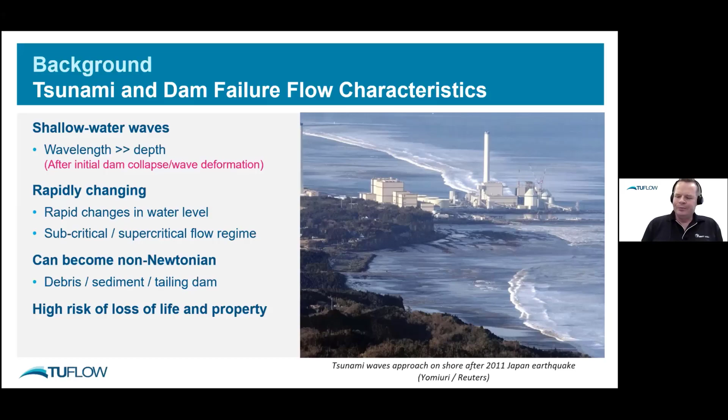Very transient phenomena, rapid changes, often regimes of both subcritical and supercritical flow with hydraulic jumps in there. And particularly in the case of dam failure, some of them are hydro dams that are just full of water, and others might be a tailings dam for a mine site, which can be full of mud, in which case you've got a very non-Newtonian flow. Whichever way you look at it, these are terrible events, catastrophic events. In many instances, a significant loss of life and a significant loss of property as well. So the better we can plan for these, the better everyone in the world will be.

For these sort of models that are generally short time scale and generally not huge physical scale, we're not talking about modeling tsunami propagation around the whole planet. We're talking about localized effects once the wave runs up onto a coastline. Including atmospheric pressure terms are really just not necessary, and likewise external forcing from wind isn't needed either.

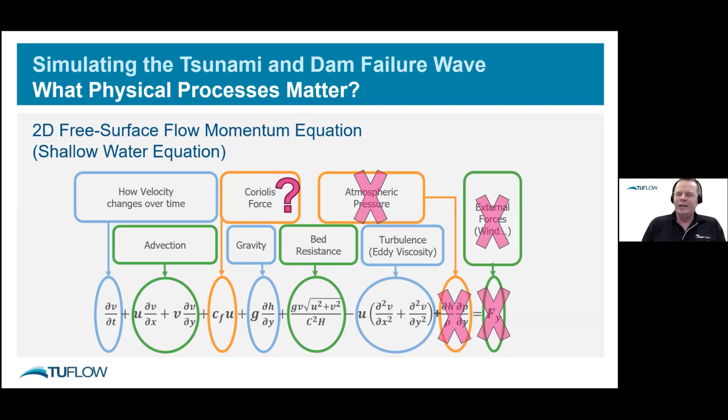The only other one in there that could be included is Coriolis force, and I think there's a reasonable argument that for most of this modelling it's not necessary, either because the physical length scales are so short, or else because we're not talking about the actual physical movement of fluid over thousands of kilometres to changing latitudes. It's a very localised movement, short, it goes back and forth. And so the Coriolis term really cancels itself out again after a short time.

But as discussed before, there's also hydraulic jumps that can happen in there. So shock capturing is important. Capturing the actual height of the waves that propagate through on land is very important, and that generally requires a second order scheme to get that nailed right.

You need an appropriate mesh size. Generally, you need a reasonable resolution within the urban environment, or in the case of dam modelling, within the river valley and any towns of interest. But then you want to be able to coarsen that mesh out in regions that are not so interesting. So the flexible mesh is really useful, or an adaptive mesh size is very useful.

The physics, again, as I said, transient with hydraulic jumps. Generally, to capture what's happening in detail, you also need small time steps. So using solvers that use an implicit matrix formulation and solving over a Courant number of 10 or 20 is not necessarily what you want for tsunami or dam break modelling. Generally, an explicit solver is what you want, and small time steps to capture the detail.

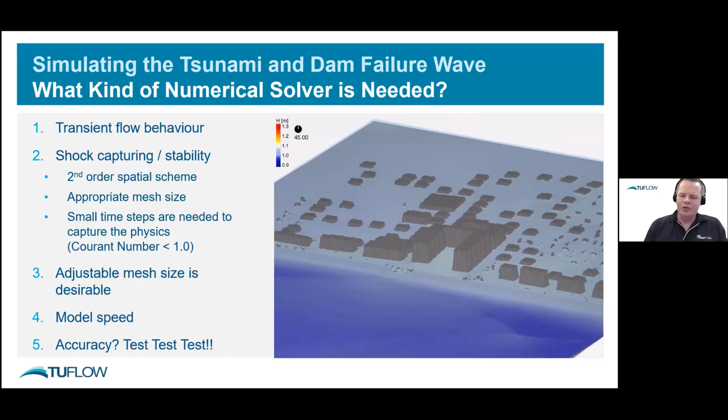We have a couple different software packages that can do dam failure and tsunami modeling. We've got the standard TUFLOW software, or the HPC, which is the GPU variant. And then there's also TUFLOW FV, which is probably one of our lesser known products, but also a very, very powerful engine. I've just captured there the common features of each solver, which are pretty much everything in blue there, and the pink is the different one.

So in TUFLOW, we've got the standard HPC solver. You can either have a regular grid, or you can have a quad tree grid with adjustable mesh size, and Shuang will show you some more examples of that later. In TUFLOW FV, it's a fully flexible mesh, triangles and quadrilaterals. The standard TUFLOW HPC uses an explicit fourth order temporal solver.

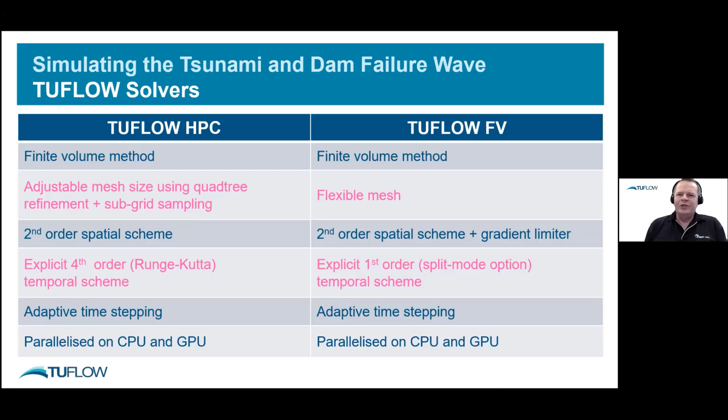Whereas TUFLOW FV, although it's a first order solver, it actually offers a mode split option, which is particularly useful when you've got the tsunami propagation from deep ocean up onto the continental shelf, because it solves the deep wave propagation separately to everything else. And both of them have got adaptive time stepping and very, very fast engines that run either on multi-core CPU or on GPU.

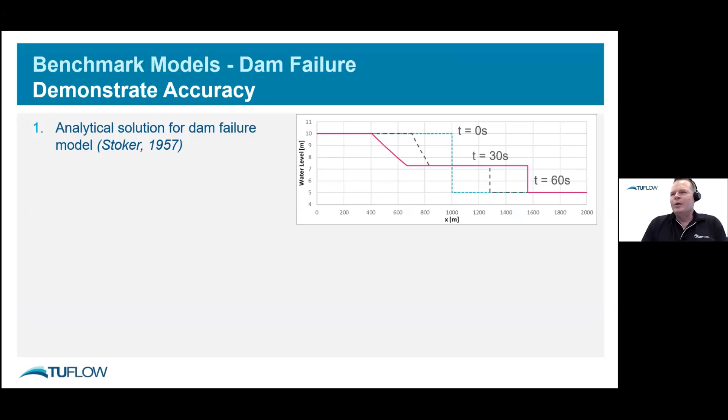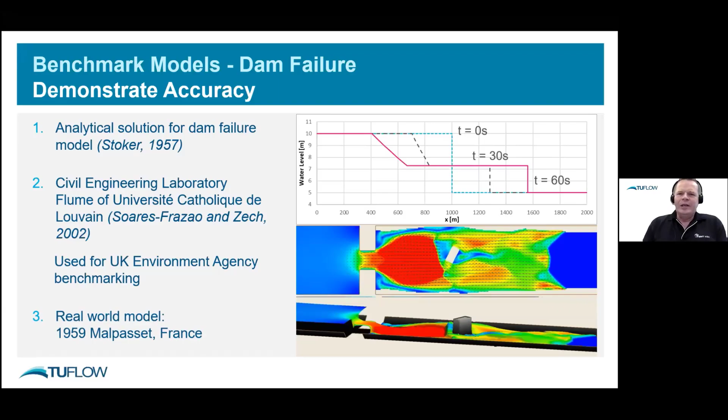Okay, so let's talk about some dam failure modelling work. The first example we've got here is a one-dimensional problem that's got an analytical solution from Stoker. The second example we're going to talk about is a two-dimensional problem of a dam breach into a channel that's got a building obstruction in the channel. And then the third example we're going to discuss is the Malpasset dam failure in France from 1959.

Okay, so looking at the one-dimensional model here, what's really important is this analytical solution from Stoker assumes hydrostatic pressure. And that basically means that it's not going to capture the initial collapse of the wall very well. But beyond that, it actually captures everything else quite well.

So we've got a step change in water depth here from 10 meters down to 5 meters at time 0. Then you remove the barrier that's holding the wall of water back, and then you let it propagate. And you'll get a kind of a half-height shelf that propagates to the right with a hydraulic jump there, a steep wall jump on the right. And then you've got a sloping wall acceleration of flow on the left. And as time goes on, those two waves spread apart in the two different directions.

Importantly, if we draw some lines there demarking the transitions of depth, we can calculate that the very left line is going to be traveling to the left at the wave celerity speed of root GH0. The next line at the bottom of that shelf propagates at the speed given by that equation there. Now, I haven't gone through all the details of the maths. This is straight out of Stoker's paper.

Then we've got U2, the horizontal velocity of the intermediate shelf of water that's now flowing to the right. And then we've got the velocity of the wall there; the hydraulic jump velocity is actually different to the fluid velocity behind it. Then we've also got the wave velocity in the shallow water to the right. You can combine all of that together to eventually get a solution that you can solve for all the different wave speeds of what's happening in there. And really the point of this is it's quite an advanced mathematical model.

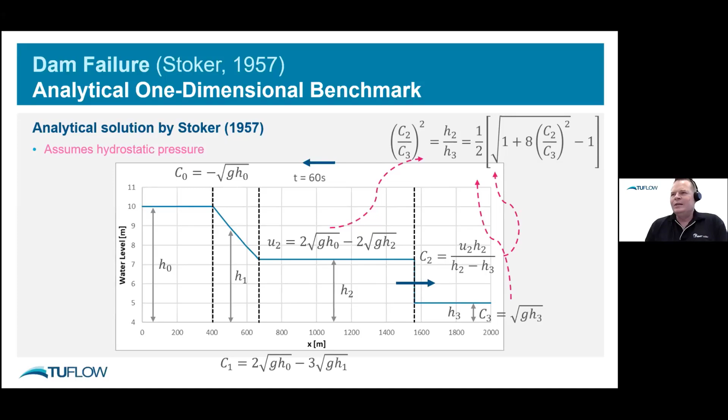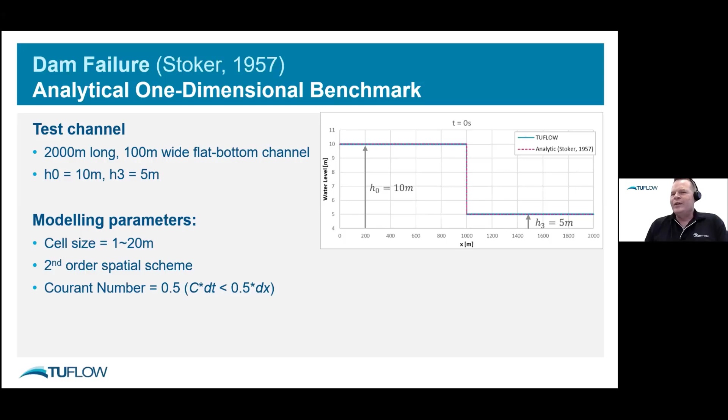Interestingly, when we actually test this with our software, by applying those equations I showed you on a slide further back on a cell-by-cell basis and capturing physics, which is continuity of mass and continuity of momentum, once you capture all of that and do it properly, then it actually reproduces the solution just fine.

So this is at time 0, and we've got two different lines there. The dotted pink line is the analytical solution from Stoker, and the solid blue line is the result from the TUFLOW HPC solver. And that's at time 30 seconds, and then at time 60 seconds, and you can see the agreement is just absolutely spot on. Now, this is using a cell size of 1 meter, second order solution, and a Courant number of 0.5, and that's 90 seconds.

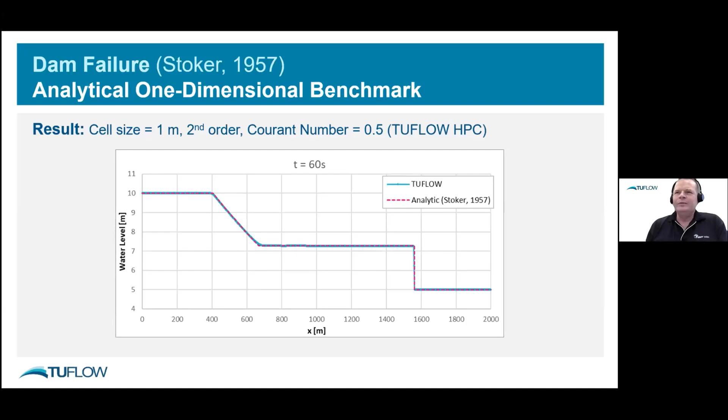Okay, now when we run this with some different cell sizes, we're plotting 3 different sizes there: the blue, the green, and the black or dark gray. The dark gray is at 20 meters, which is starting to get quite a coarse cell size, and we are actually beginning to see a little bit of blurring of the edges of the solution on the left-hand propagating wave, and also a little bit of a numerical artifact in the hydraulic jump at the right-hand side, which is a function of the second order calculation.

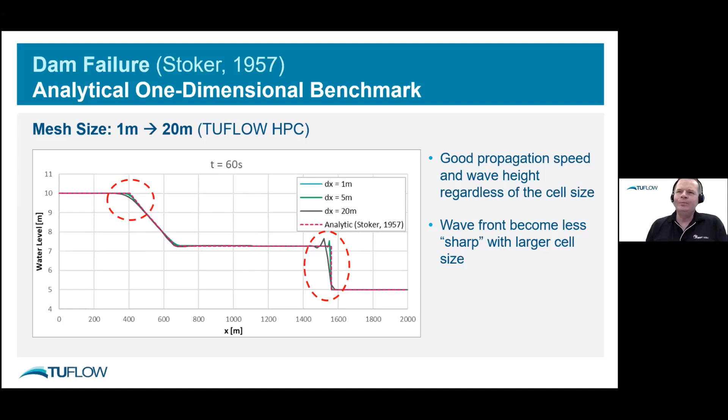In TUFLOW HPC, that second order calculation is tuned quite highly so that it tries to stay second order for as much as possible before dropping back to a first order solution. And that's giving that little edge there.

We can run the same model in TUFLOW FV, which is our flexible mesh solver. In particular, its second order spatial solution is tempered with a gradient limiter, which prevents that little artifact from happening on the hydraulic jump on the right-hand side. Although the price of that, as you can see on the left-hand side, is it hasn't quite captured the sharp edges that you can see on the analytical solution. But overall, it's still a very, very nice solution.

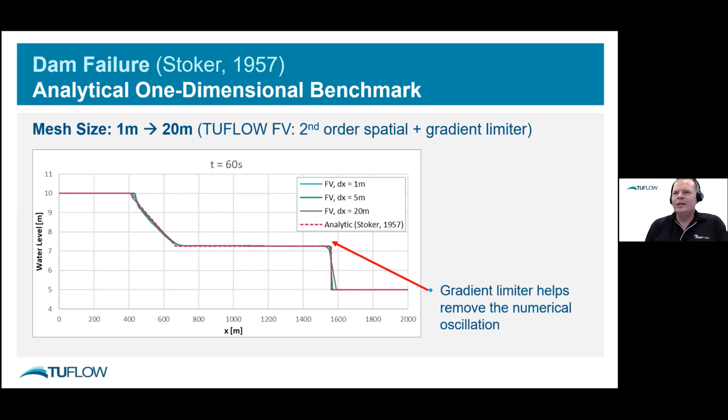So that goes back to what I was saying earlier about the initial collapse of a dam wall. If it's an instantaneous failure, you won't get exactly the right solution for that first number of meters either side of the dam wall. It's not until it propagates further downstream that the solution will be right. However, dams don't always fail with an instantaneous collapse of the wall. Sometimes you get a piping failure, which is just a gradual leak that grows and grows, and then the breach widens. So the failure mode of the dam has got a huge dynamic range of possible flow rates.

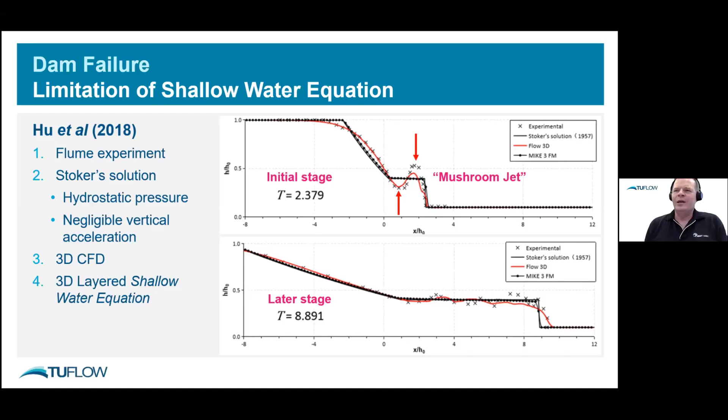Okay, so now we're on to the second case I was talking about, which is a two-dimensional model where you have a channel. You've got a reservoir at one end. You've got a dam wall with a gate. It's not a full width gate. It's only about less than a third of the width of the whole channel; it's about a quarter of the width. And then you've got a building that obstructs the flow as the flow comes out of the gate and discharges into the channel.

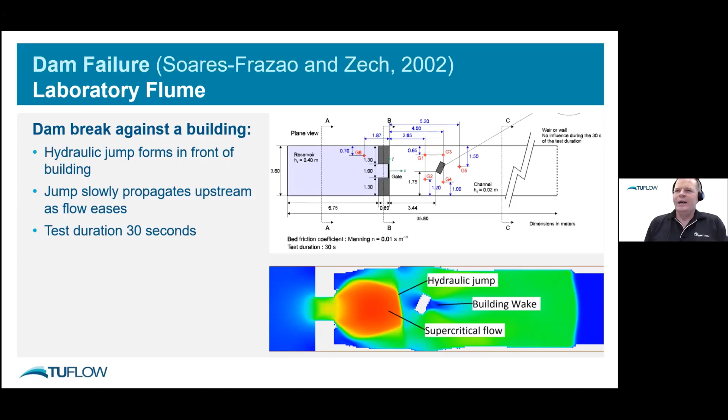And as you can see in the image down the bottom there, which is taken from a point in time after the breach, you get supercritical flow coming out of the gate, and then you get a hydraulic jump in front of the building, you get a wake behind the building, you get another smaller jump in depth that's propagating to the right further down. It's quite a complex solution that you get here, and certainly there's no analytical answer for it.

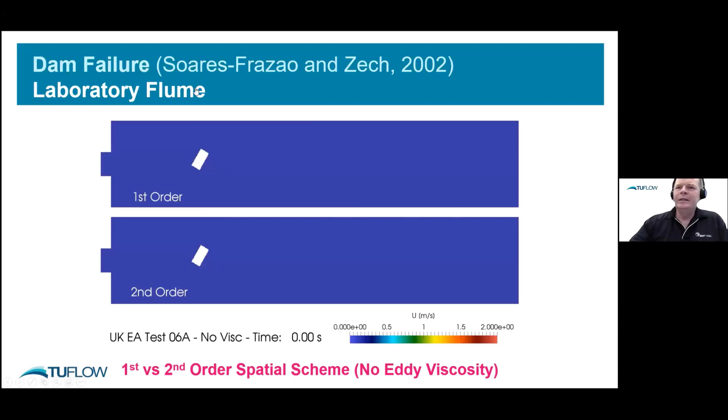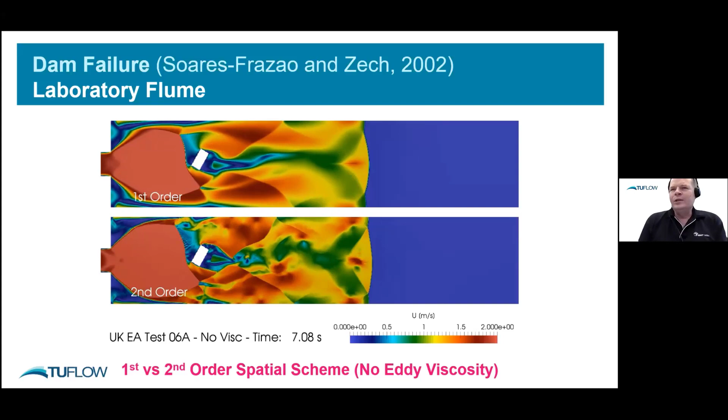But what I want to point out here, hopefully this movie is coming through for you now. This is an animation showing velocity as a function of time. The animation up the top is using a first order solution. The animation down the bottom is using a second order solution. And very importantly, both animations have no viscosity, no extra viscosity added.

So the second order solution, down the bottom there, you can see is very, very detailed and rich in hydraulic jumps and vortices and vortex shedding from behind the building and wakes that wiggle back and forth like a snake's tail. Very pretty solution, but really the question is, is it right?

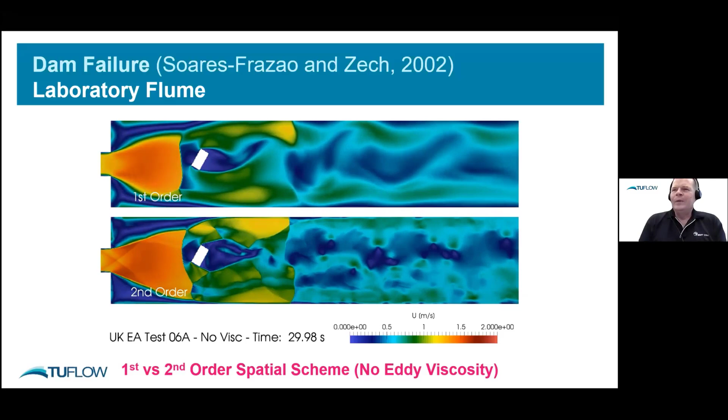What I want to point out from this animation is that the second order solution is much sharper than the first. The edges of the hydraulic jumps and so on are much better preserved in the second order solution. The first order solution looks like it's already got some viscosity in it. And that's exactly right. That's what first order does: it adds a numerical component of viscosity to the solution.

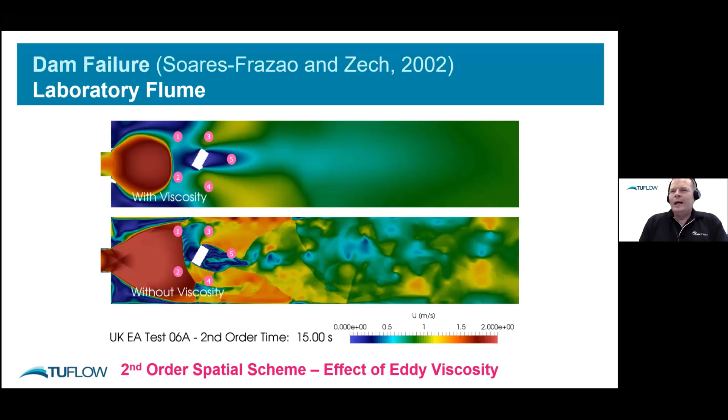And we've done a lot of work on this over the years, and we have actually arrived at a viscosity model that seems to work very nicely across a broad range of experimental sizes, all the way from lab scale to intermediate scale up to real world scale, without the user having to keep adding or adjusting terms.

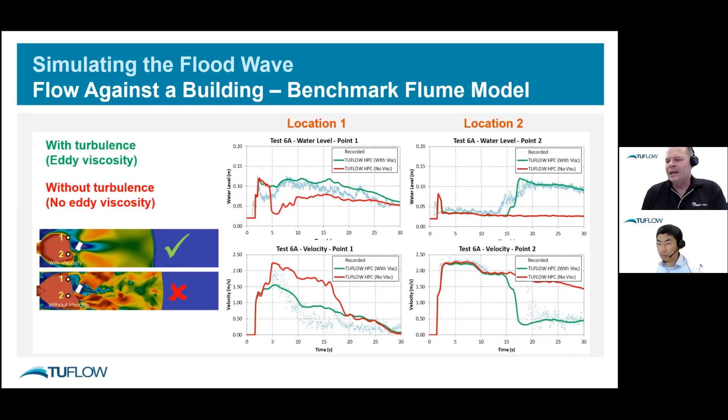Okay, so that's the end of my first segment. I'll hand over to Shuang now, and he'll take you through the Malpasset Dam failure and then a whole lot of tsunami modeling work. I'll come back at the end to talk about non-Newtonian.

Thank you. Thanks very much, Greg. It's an amazing introduction, very interesting modeling result. Thanks.

So in the next part we'll introduce a benchmarking test for a real-world dam failure model, which happened to the Malpasset Dam in France back in 1959. The dam collapse was caused by the rise of the dam water level due to rainfall, but the dam was also called the thinnest dam in Europe at that time. Surprisingly, we actually found some video clip from that dam failure, so I'd like to switch to this one and play it briefly.

And as you can see, a big chunk of the dam wall collapsed almost instantly. The report says that almost the entire dam wall collapsed during the dam failure event. So it generated a 40-meter high wall of water moving rapidly downstream. And unfortunately, this event happened at night, so it caused mass casualties.

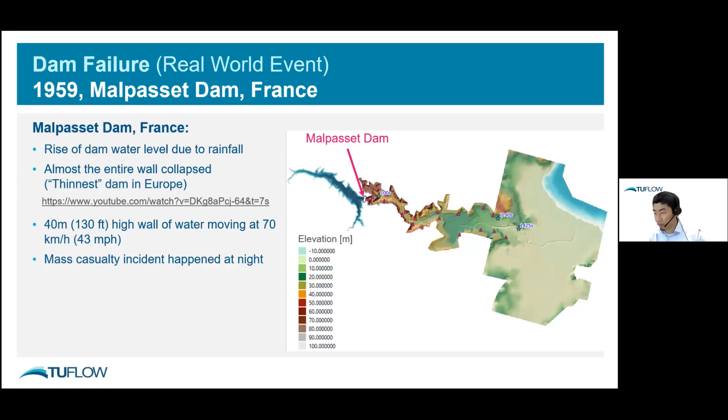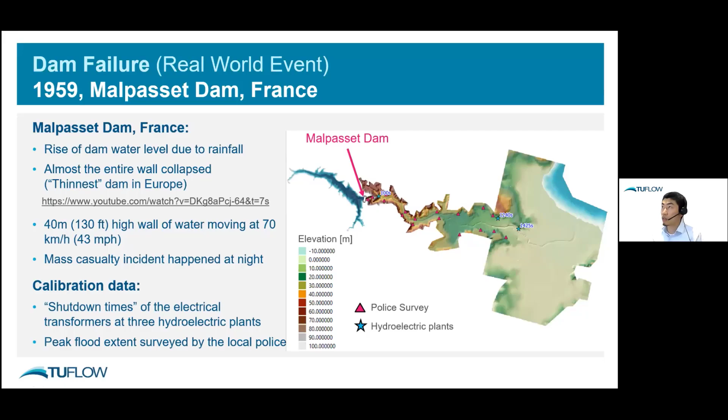At that time, there were 3 hydroelectric plants inside the valley, which recorded the shutdown time, so we can use that to calibrate the arrival time of the dam water. After the event, the police also conducted a field survey to obtain the flood extent. So we are going to use those 2 data to calibrate our model.

For the modeling, we used a 20-meter DTM and 20-meter cell size. Because the resolution of the DTM is relatively coarse, we didn't apply SGS. And for simplicity, we also used a uniform Manning's n across the whole domain, and we calibrated the Manning's n from 0.03 to 0.05. The initial water level inside the dam was 100 meters. And again, for simplicity, we assumed the water was released instantly.

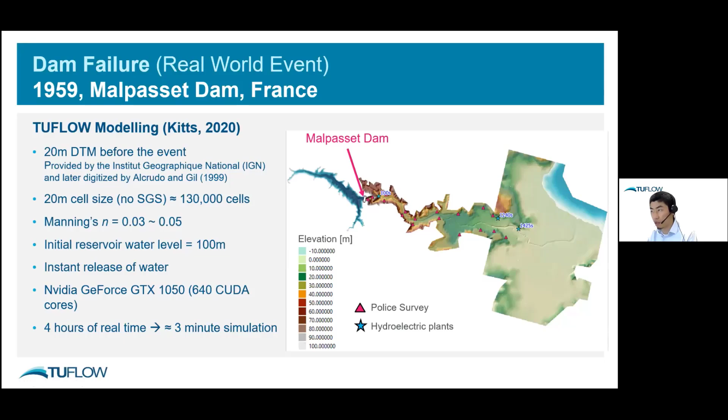We did the simulation on a mid-range GPU card, and it only took 3 minutes to complete the 4 hours of the real-world event. So here is the animation of the modeling result. As you can see, the dam water is released and moves very rapidly downstream. And it's also hitting all of those survey points, so it's matching the flood extent, which also indicates the height of water when it arrived at those points is in a reasonable range.

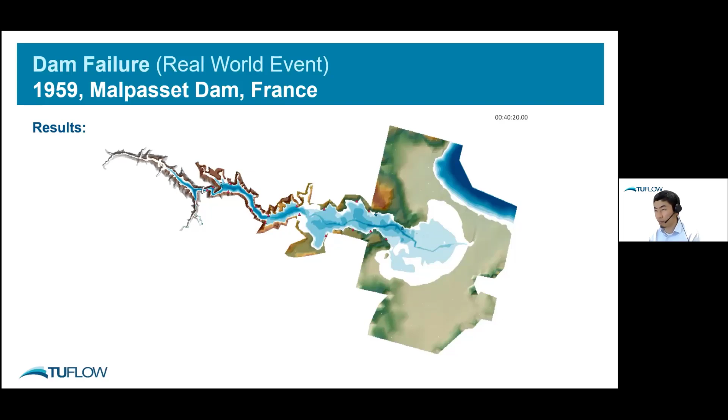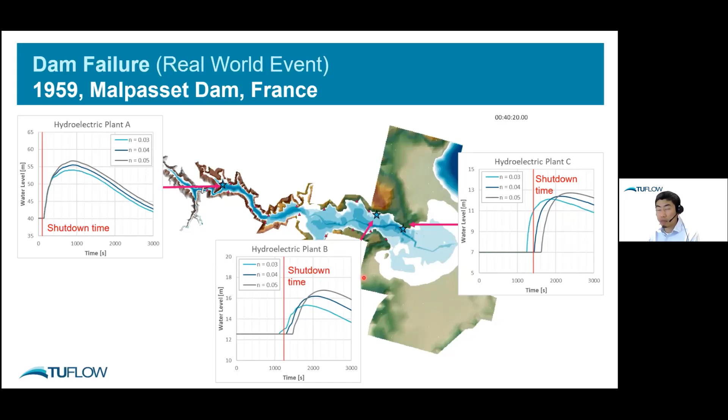This wraps up the dam failure benchmarking test, and in the next part, we'd like to move on to the tsunami benchmarking model. In this section, we compared our model against 2 events. One is a large-scale lab experiment, and the other was the real-world tsunami event that happened in Japan back in 2011.

So dam break flow and tsunami flow share lots of similar hydraulic characteristics, but what we found very challenging in tsunami simulation is, first, the source of the tsunami and the receiver we want to study are usually much, much farther apart. In this case, it's about 200 kilometers away from the source of the tsunami, and it took about 1 hour for the peak of the tsunami to arrive at this location.

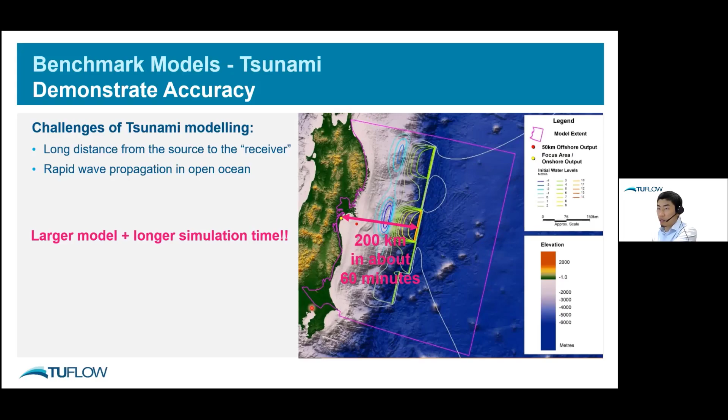And also, a dam failure usually happens in a constrained valley, but a tsunami happens in the open ocean. So we usually have to create a much larger model domain, which results in much longer simulation time. So this is where flexible mesh or quadtree mesh can really shine. And of course, GPU acceleration will help a lot with the simulation time. So in the next part, we would like to focus on those two parts.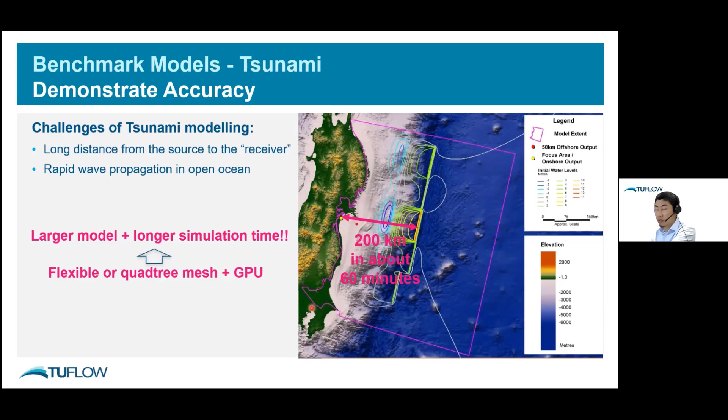So the first case is a large-scale flume experiment done at Oregon State University. They created a physical model of a seaside city called Seaside, and they conducted lots of measurements, including optical measurements and velocity and water level measurements at some gauge points. And we would like to thank Dr. Park and their team for sharing the data with us so that we can carry out this benchmarking test.

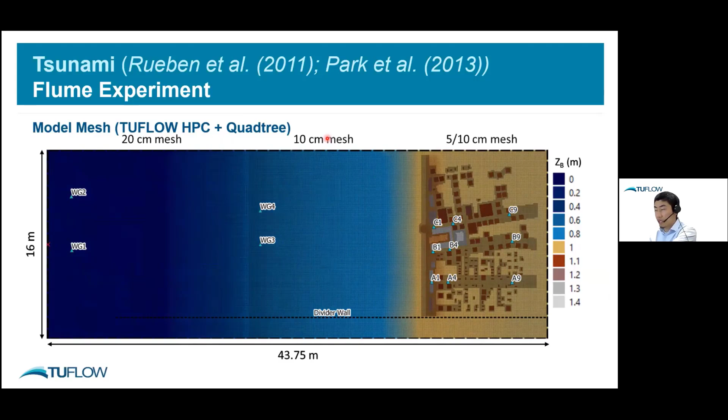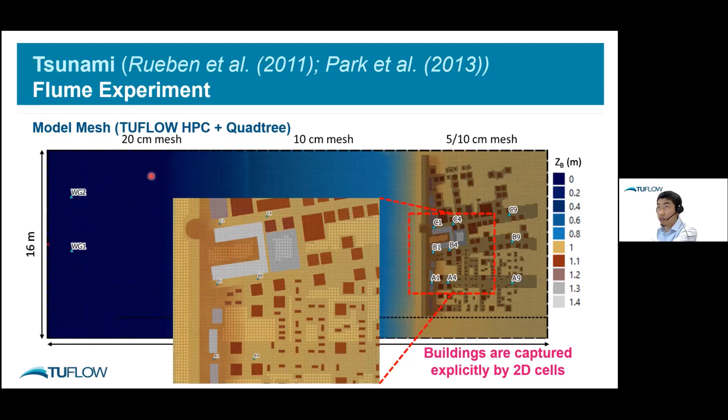So for the modeling, we used TUFLOW HPC and quadtree refinement. We applied 3 layers of refinement with only 5-centimeter grid inside the urbanized area, and then we relaxed the mesh size on the ocean side. So with this powerful tool, we can really explicitly capture those buildings with 2D cells, just increasing the bed elevation, instead of traditionally using a large cell and just bumping up the Manning's n.

So this is the modeling result. With this level of refinement, we can really get the result at street level. And as you can see, the wave is propagating, hits the buildings, and runs up through those streets.

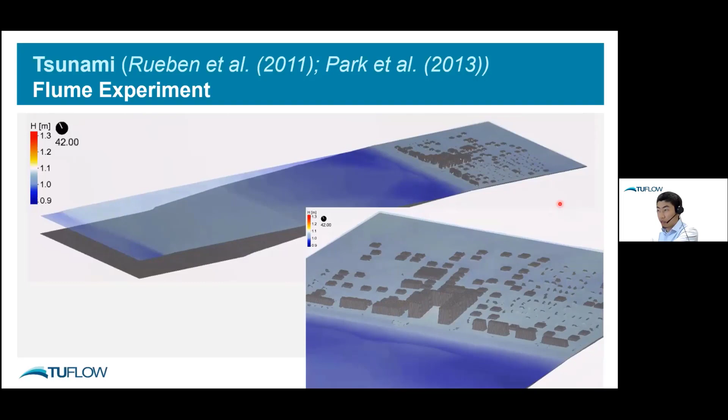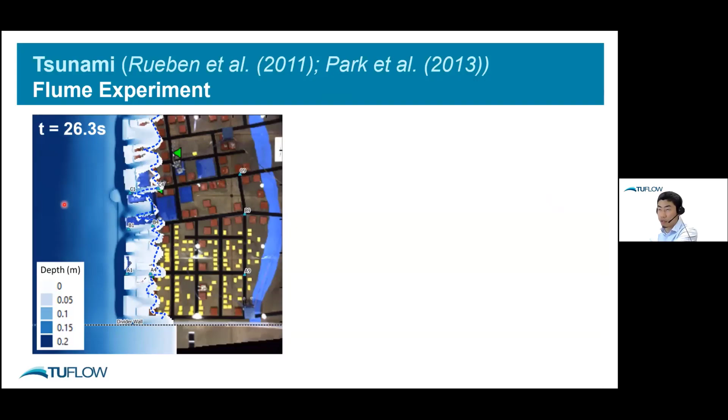So in the next section, let's compare the result with the experiment measurement. So this image, the blue dot line shows the optical measurement of the tsunami front location at a time of 26 seconds. And of course, the blue contour is the modeled result. And this is 2 seconds later.

And here is another evidence that tsunami flow is highly transient. As you can see from those white water, there's lots of hydraulic jump happening after this building and before it hits the second line of buildings. And in simulation, we also captured this, as you can see from the water depth contour.

So very shallow depths here, and it became much deeper here. So there's some hydraulic jump happening here and also here. So yeah, even if we don't get this perfect in detail, those phenomena are captured in our model.

And back to the propagation area, as you can see around this street, the model produced very good agreement with the measurement, but around those 2 streets, the model result is somehow behind the optical measurement. So we took a further look at what's happening inside this street.

Because in a regular grid mesh, we inevitably create some mesh that acts like a vertical wall against the direction of flow. We call this a sawtooth effect, and it will create extra artificial loss that will slow down the tsunami propagation. So in this study, we also applied the subgrid sampling.

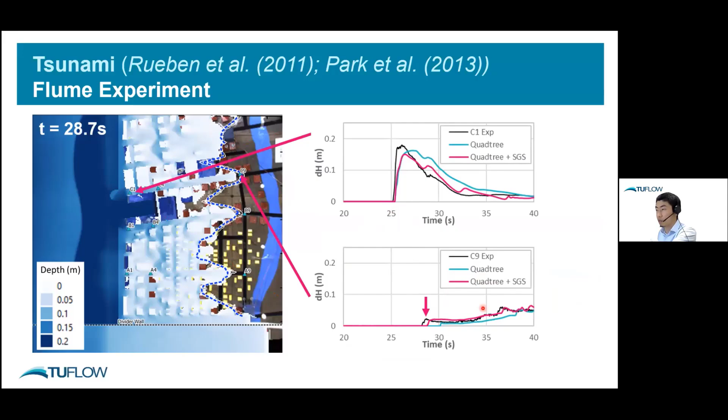Also, let's look at the maximum height here at the first gauge point and the last gauge point. And again, as you can see, SGS, the pink line, will improve the arrival time significantly compared to the non-SGS model. And the maximum water level is also in good agreement.

So let's move on to the next case, which is the real-world tsunami benchmarking model that happened in Japan after the magnitude 9 earthquake back in 2011.

At that time, I was doing my PhD in hydraulic engineering in Japan on the day of the earthquake. So I still remember that day vividly, and it was quite scary to learn about those events from the news. But that also, I think, motivated me to chase my career. And right now, I feel really privileged to be a part of a software development team, and the software we develop can be applied in this area.

So it was one of the most significant tsunami events recorded in history. By the time the water arrived at the coastline, the wave height was from 2 to 16 meters. This image shows a very high seawall, 10 meters high, and it was designed for a 50-year tsunami event, but even that one was overtopped, and so much water washed up the coast.

And as you can imagine, it caused massive casualties. Actually, 90% of the casualties were caused by the tsunami rather than the earthquake itself. And there were several GPS buoys offshore which recorded the water level. And after the event, the researchers also conducted a massive field survey to obtain the flood marks from the tsunami-hit area.

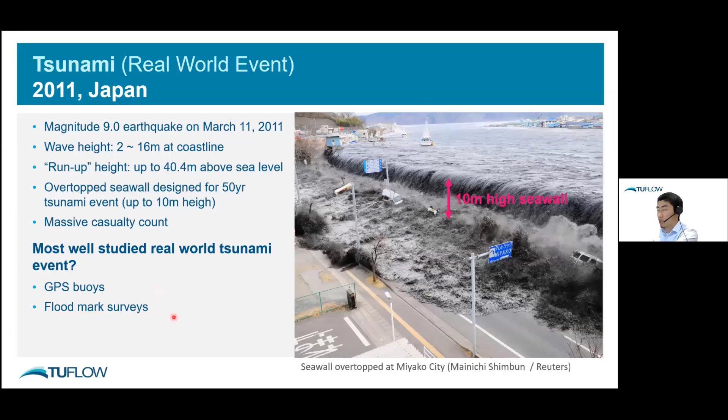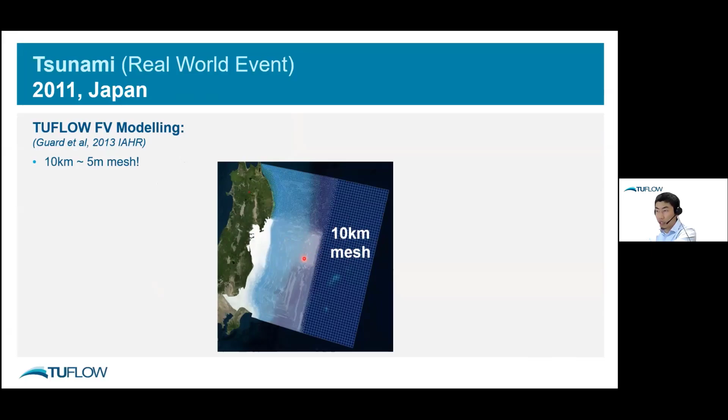So for the modeling, we applied TUFLOW FV flexible mesh modeling. And as you can see, we varied the mesh size significantly. It ranges from 10 kilometers here, the other side of the ocean, and here is the source of the tsunami. And at the onshore area, we refined the mesh to 5 meters so that we can get very detailed tsunami height there. In this presentation, I will present 2 mesh resolution models.

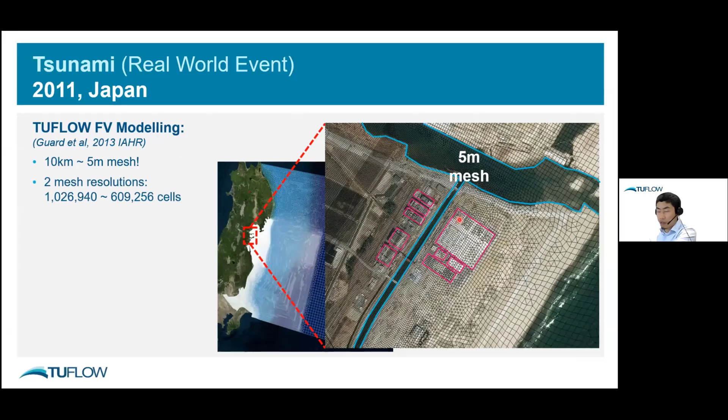Also, I will compare first and second order spatial schemes, and the boundary condition or the initial water level was derived based on undersea bed deformation, which was a study done by Tohoku University. And we ran the model on a high-end GPU card; it only took less than 20 minutes to run the whole event.

So again, we'd like to show 2 videos and ask everyone to guess which one is the first order and which one is the second order. Okay, I will just pause this one here. The one on the right-hand side, as you can guess, is the second order because it has much darker red and a very sharp edge of the tsunami front, and also very sharp reflection from the coastline.

I'd like to just play this video again to show that the tsunami propagates really fast in the deep ocean, but it became really, really slow in shallow water, especially inside this bay area.

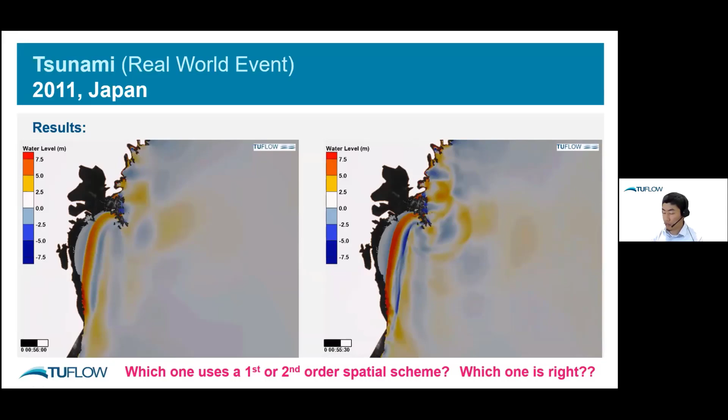So the next question is, again, which one is right, the first order or the second order? To answer that question, again, we have to compare the modeling result with the field measurement. And for that, we have water level recorded at one offshore GPS buoy, and we also have 5 watermarks in this urbanized area.

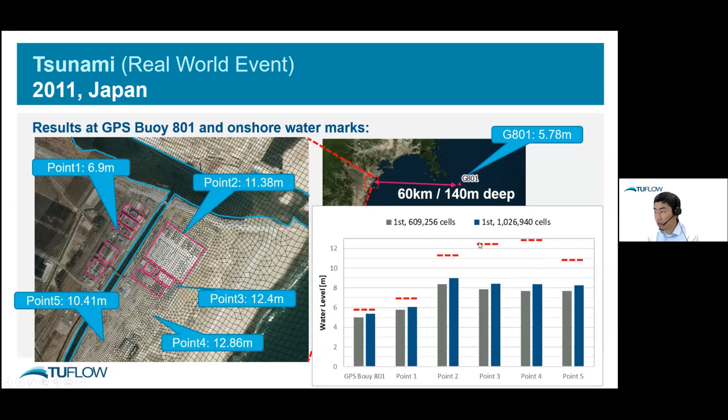So this is the result from the first order model. The gray one has relatively coarse mesh, and the dark blue has a much better mesh resolution. The mesh refinement does help increase the water level, but still it's quite far away from the observed water level. But once we use second order model, the agreement became much better at this GPS buoy, as well as those points 1, 2, and 5.

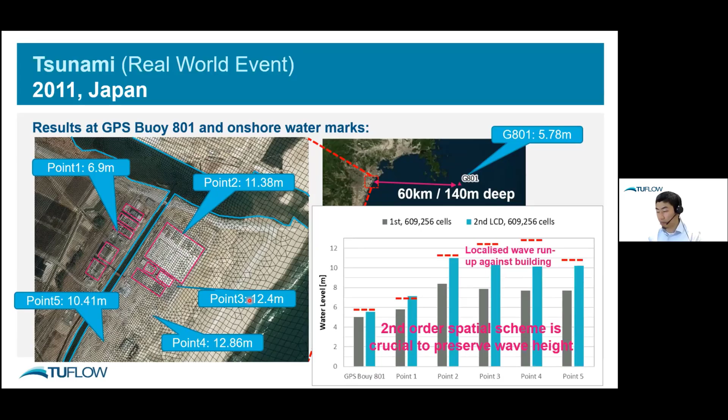Points 3 and 4 are the first building from the coastline, so we think there is some localized wave run up. That might cause some small differences, but overall, it demonstrates that the second order spatial scheme is really crucial to preserve the wave height in this kind of tsunami simulation, where you have a huge range of mesh sizes. So that wraps up the tsunami benchmarking.

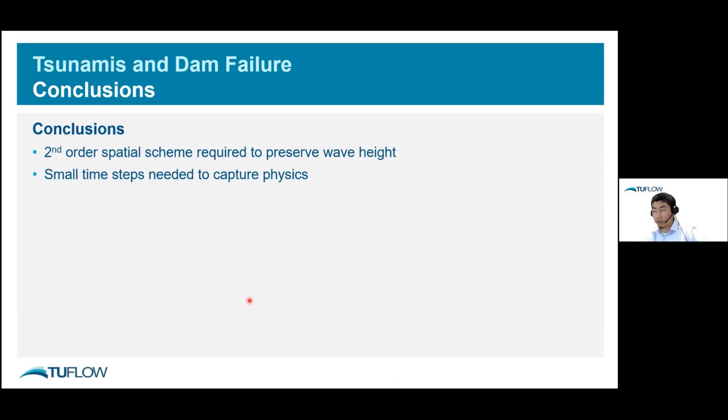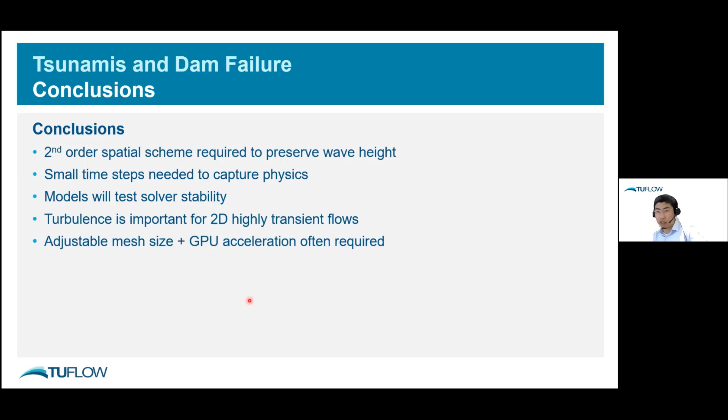And before we move on to the non-Newtonian part, I'd like to show some conclusions for tsunami and dam failure modeling. As I just mentioned, second order spatial scheme is crucial to preserve the wave height, especially in tsunami modeling. And of course, small time step is needed to capture the physics. Because those two types of flow are highly transient, it will really test the stability of your model. And as Greg showed, the turbulence is very important because it's a 2D phenomenon. And again, adjustable mesh and GPU acceleration is always very helpful.

So yeah, we'd like to repeat our message that it's crucial to do a benchmarking test and know the accuracy and reliability of your model. If that's not possible, just try to check if the model you are using is designed to model this phenomenon and if they have benchmarked against that.

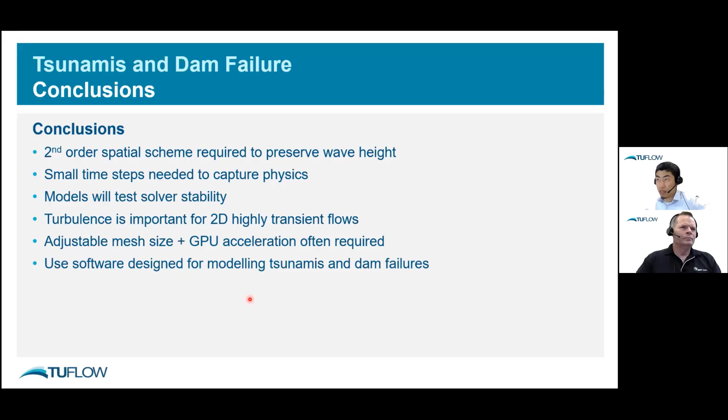So thanks everyone. I will hand the presentation back to Greg. Okay, thank you, Shuang. I really appreciated your inside knowledge there, Shuang, into actually having been there and experienced the fear of those around you, of the significance of those events. And like you said, it is a privilege for all of us to be able to work in an industry where we're actually about preserving human lives first and preserving our infrastructure second.

There's another model called the Bingham plastic model, which still uses a linear response, but it has an offset, which means that it takes a certain quantity of shear force in the fluid to begin to make it shear. So this means that the fluid is actually representing a bit of a solid, something perhaps like jelly or a creme brulee. It doesn't move at all until the shear stress gets beyond a certain amount, and then it will begin to flow.

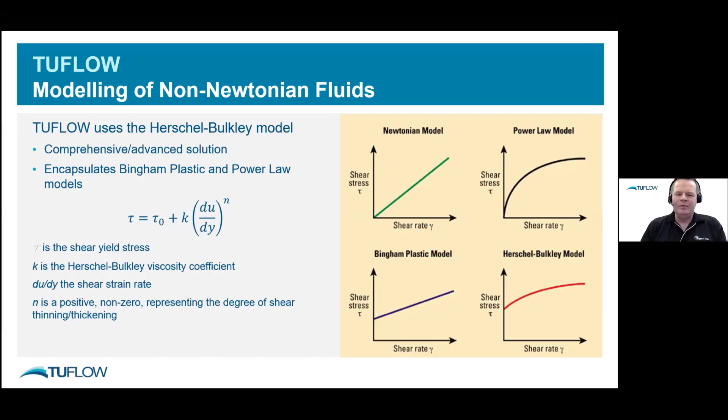The fourth model in the bottom right encapsulates both the power law model and the Bingham plastic model, in that it's got a power law component and a yield stress component. That's expressed in the equation you can see there. That equation's a little bit idealized. Obviously, if n is 1.5, then you can't put in a negative shear rate. So you use the absolute value of the shear rate, raise it to the power of n, and then multiply it by the sign of the shear rate afterwards. Likewise, the yield stress tau 0 will flip sign for flow in the opposite direction. So you get a dead band of plus or minus tau 0 where the fluid doesn't move.

Some benchmarking work. We've implemented that Herschel-Bulkley model in TUFLOW HPC, and then we needed to benchmark against some real-world tests. The first example here is a laboratory scale example using Carbopol solution, a paper by Cochard and Ancey, where they had a reservoir of the fluid. They would open a gate and let it flood out into a puddle on the ground outside the gate. They would repeat this test with different concentrations of Carbopol to give different properties, as well as with the whole rig on different slopes to represent gravity acceleration with the flow.

They had quite a technically challenging way of presenting the results, in that on one hand, they would do a top-down view to look at the footprint or contact line of the flow as a function of time.

And the other view they used is a side-on view to look at the centerline profile of the fluid as a function of time. And they would combine those two sets of results into one graph. So the graph you can see there on the right, the bottom half of it is the top view of the contact line, and the top half of it is the slice view or the side-on view of the center line.

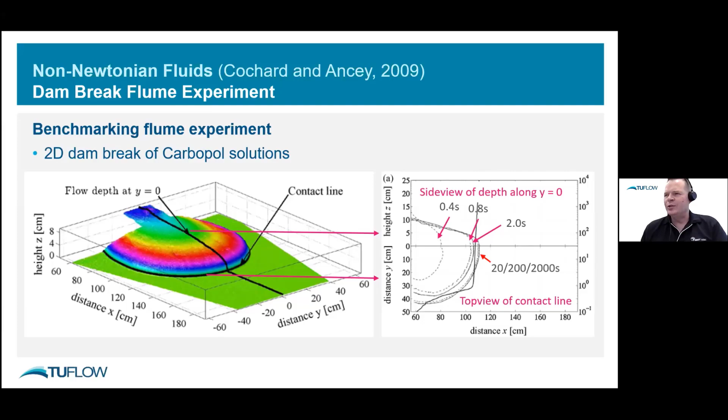And you can see that there's dotted lines there marked for 0.4 seconds, 0.8 seconds, and 2 seconds. And then eventually it just comes to a stop. So the 20, 200, 2000 seconds are pretty much all in the same place because the fluid has come to a stop. It's reached its yield stress. There is a solid line on there as well, which is even more confusing, and that's the propagation distance from the gate as a function of time on the right and distance on the horizontal axis.

So anyway, we've repeated this test in modelling and simulation with TUFLOW HPC. We've just punched in exactly the same numbers as what they had published in the paper for their Herschel-Bulkley model coefficients with a yield stress of 78 pascals. So in this case, a shear thinning power of 0.388. It means that the fluid appears less viscous the more you work it.

And what we've got there in the plots is the blue lines represent the simulation results. Now, the agreement is pretty good. It's not 100% perfect, particularly at 0.4 seconds and 0.8 seconds, but the final footprint of how far the fluid went and its overall centerline cross-section is not too bad.

The very plot on the right is when you have a downhill slope of 12 degrees for the laboratory rig. So you get a bit more gravity assistance on the flow. So you can see it's moved a bit further. And again, the final footprint's pretty good. There's some discrepancy at 0.4 seconds. We think that that is possibly due to the opening time of the gate.

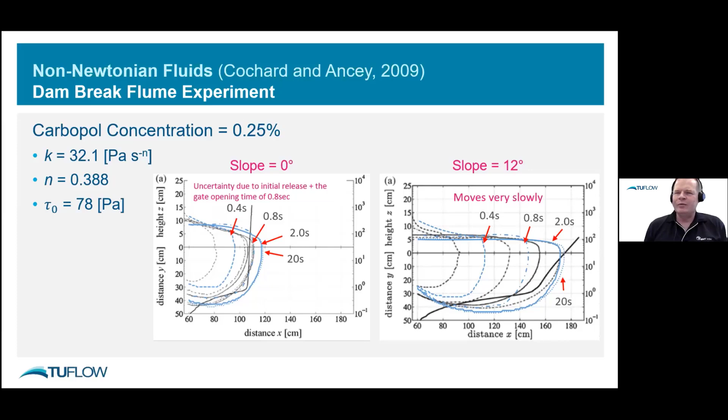In the paper, the authors mentioned that it actually took them somewhere around about half a second or maybe more to physically open the gate for the fluid to move, in that basically the fluid had already reached the 0.4 second footprint mark before they had finished removing the gate. So that's possibly just some experimental difficulties there in getting a rapid gate release of the fluid. But the agreement's there.

Real world application, many of you will have seen this particular dam break in Brazil, the iron ore mine that had a tailings dam in the hill behind the mine, and it suffered really what can only be described as a catastrophic collapse. Just the entire wall of the dam just gave way in one go. Tremendous velocities as the fluid escapes and comes down, ripping out trees and everything. It really is quite spectacular.

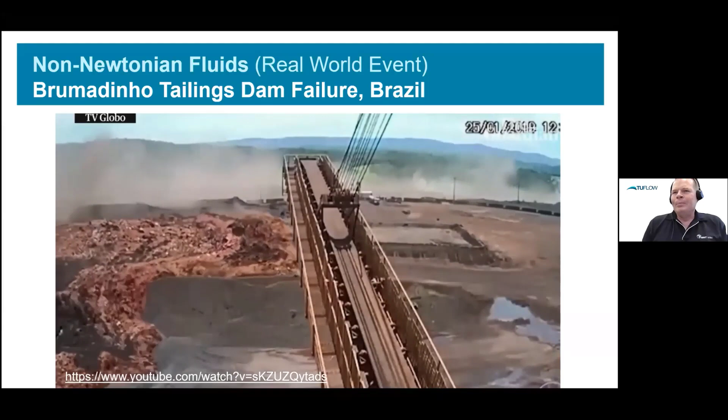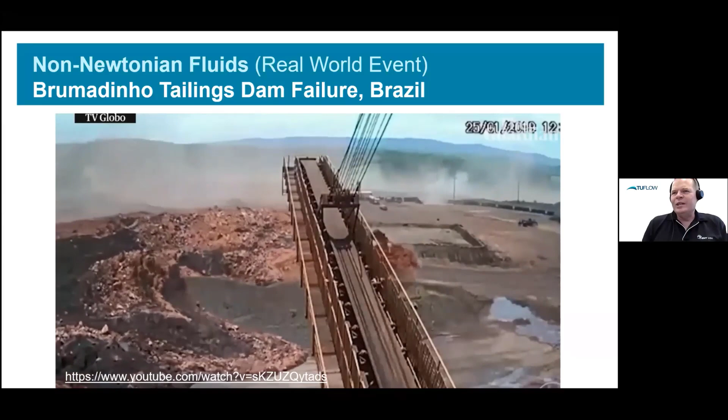Here we've got the fluid coming past the mine site. This is some couple of minutes after the initial burst. And what you can see there is that is not water. That is absolutely not water. That is goo. That is thick mud that's got a sharp wall on the front. It's got a yield stress. It's got high viscosity in the way that it moves. It's a very unusual material. And if you tried to simulate that particular dam break with a water-only model, you would absolutely get the wrong results.

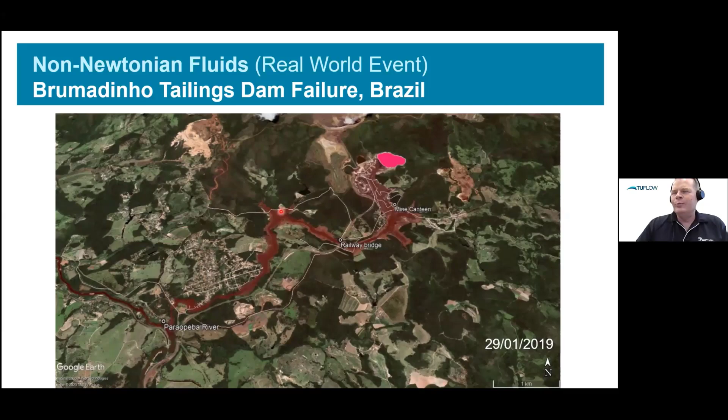What we're looking at here is a satellite image of the dam, which is in the pink zone up in the image. It comes down the valley in this direction and flows down. It comes past the mine site, which is in here, and the railway bridge, and eventually comes down to join the river down the bottom. And this is what that looks like, satellite view after the event. So that brown color is actually where all the fluid went that came out of the dam. Obviously, it did end up going a long way.

We've run a model of this particular failure using the non-Newtonian formulation, picked up the digital elevation model, which may or may not be exactly correct. It was acquired a little bit in time before the failure, and there may have been terrain changes in between time. We used a 10-meter resolution that was a pretty close match of the original digital elevation model. This is really one of the big unknowns when it comes to dam modeling.

This is our input hydrograph that we used for this particular failure. Now, this comes out of another research paper from Lumbroso 2020, who used some modeling software to attempt to calculate an approximate hydrograph that represents the breach.

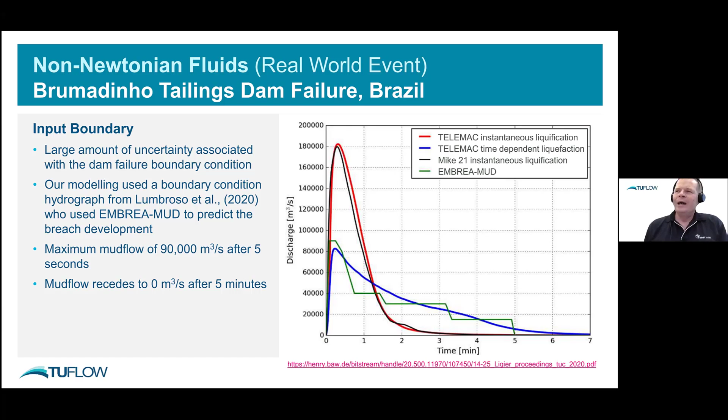But in reality, I mean, it's one thing to do a hindcast where you look back and try and remodel something that happened in the past, because if you've got some evidence of what the breach looked like, then you can at least have a reasonable stab in the dark at what the hydrograph is going to be. But in terms of predicting future failure scenarios, that's a very difficult thing to do. You have to consider, well, what would a slow breach look like? What would a medium breach? What would a very fast breach look like? Or a catastrophic collapse, and present all of those possible results.

Okay, in the non-Newtonian formulation, you just need the main viscosity coefficient K. You need a shear thinning or shear thickening exponent N, the power law exponent that goes into it, a tau 0, which is the yield stress. And in TUFLOW HPC, we also put in some viscosity limits of low and high. That's partly because the shear thinning and shear thickening power law models give some unusual results. The shear thinning model, unfortunately, diverges to infinite viscosity at near zero strain rate. And infinite viscosity is going to be a problem when it comes to solving the solution. So we put a clamp on the limit there.

We tested a few different parameters, K of 30 to 100 pascal seconds, N of 0.5 up to 1, and tau 0 anywhere from 400 to 4,000 pascals. Also with a high fluid density as well. It's not just water. This is tailings mud that's got a lot of iron ore in it. And so it's pretty high density. And we ended up settling on actually using an N of 1, which is indeed Newtonian viscosity, but it's a high viscosity at 60 pascal seconds, and also it's got a big yield stress. So what we ended up implementing was just the Bingham plastic model, but the formulation, of course, is fairly universal.

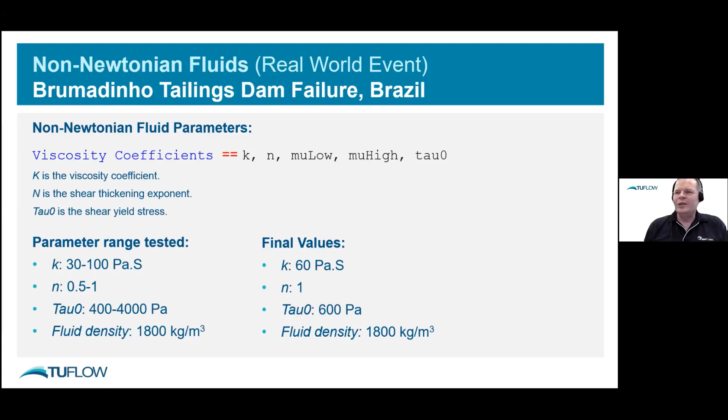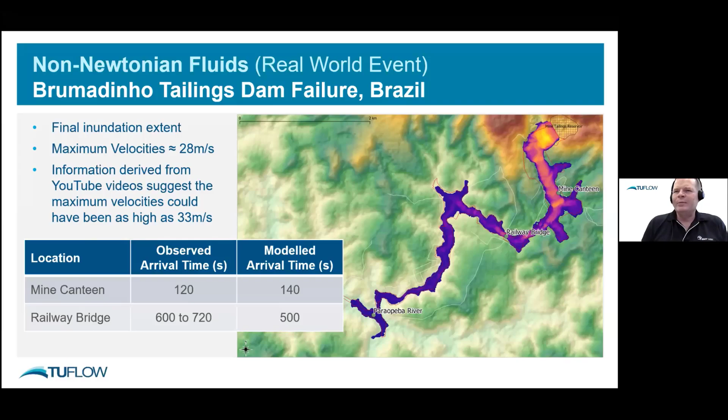But as I said, it's one thing to do this in hindcast, but to make forward predictions, if someone's got a dam that hasn't failed and wants you to say what could happen, then, you know, what's the volume inside the dam? How much is actually going to come out with a breach? What does the breach look like? How fast is it going to collapse? And what actually are the material properties for what's in the dam? It might look like slightly solidified mud capable of withstanding a reasonable yield stress in situ, but once it's released and that yield stress is exceeded and everything gets disturbed and mixed up, its properties are going to be quite different again.

The only thing you can do is do your best to source sensible material data, do your best to interact with the client about the possible input scenarios, and present to them a spread of results. Run the model 100 times with different cases and say, this was the median result, this was the worst 10% of cases that went this far, and this was the best result. And it's up to them, of course, to choose what they're going to do with those. It's a very, very difficult field to be working in. Modeling potential collapses of non-Newtonian materials and producing sensible results for someone. It's hard work.